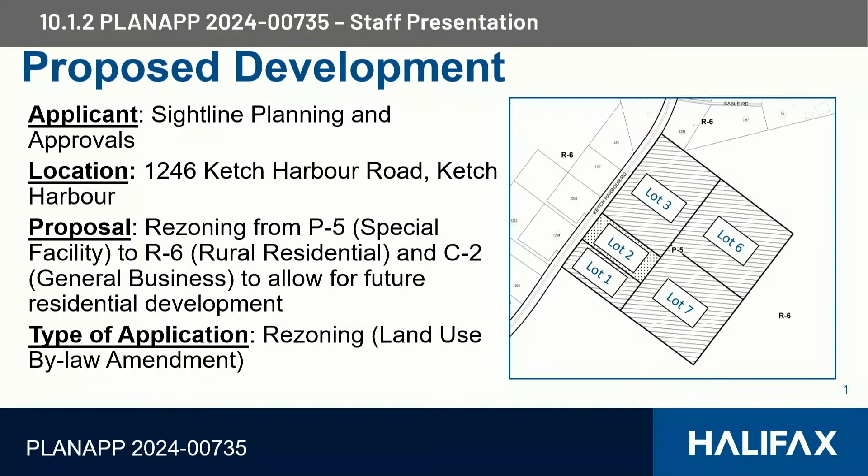Our applicant this evening for this application is Sightline Planning and Approvals. Again, our location is at 1246 Ketch Harbour Road in Ketch Harbour. As shown here in the photo on the right, we're looking at rezoning the larger PID from P5, which is the Special Facility Zone, to R6, which we call the Rural Residential Zone, and the C2 General Business Zone, to allow for future residential development. So again, our application is a rezoning application. Excuse me, could we get the volume put up a little bit?

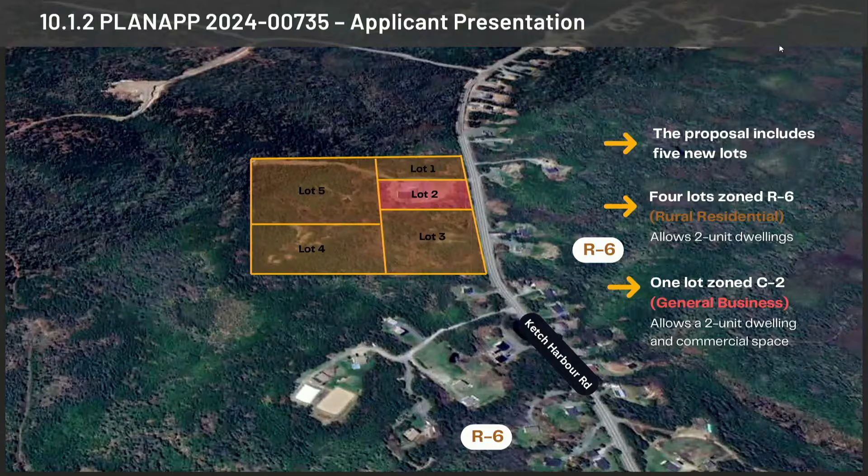If the rezoning is approved, the property owner would be allowed to convert that existing building into a mixed-use building with up to 5,000 square feet of commercial and 2 dwelling units, or convert the existing building to residential units only with 2 dwelling units, similar to the other lots with that rural residential zoning.

If the rezoning is approved, the 4 rural residential lots would allow for single unit and 2 unit homes, shared housing, or home businesses.

JRL Consulting submitted a traffic impact statement, and the results show that the traffic generated by the proposal is minimal, and so is traffic in the immediate area, so we don't expect any significant impacts surrounding the transportation network.

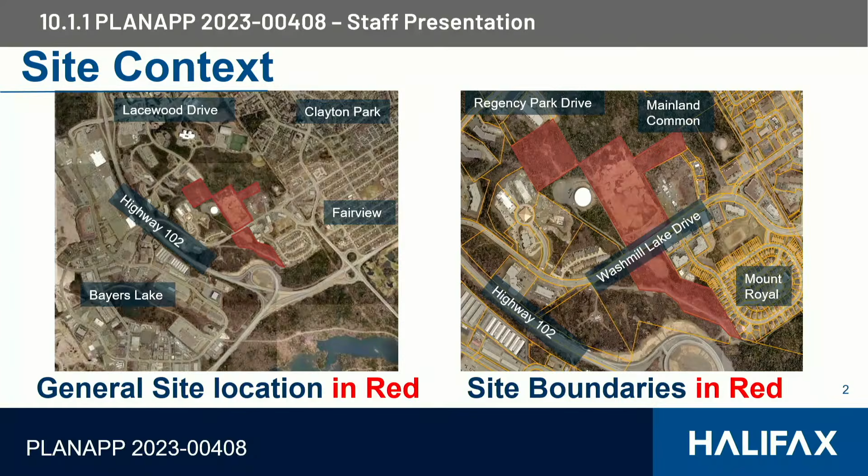For neighborhood context, the site is surrounded by a mix of uses, although it's predominantly residential, provided mostly in apartment building form, largely mid-rise apartment buildings. There are some low-density residential uses shown near the site. For other uses, it's largely recreation, parks, and institutional uses, including the open space of the Mainland Common, plus the rec center and the high school located nearby.

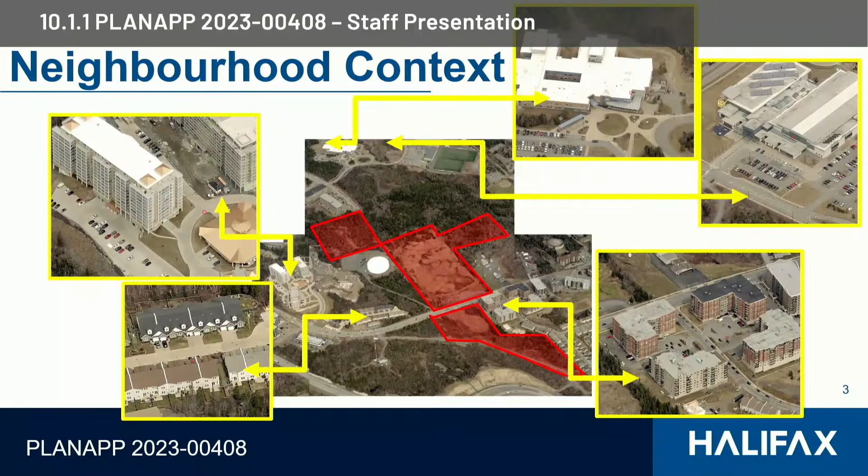Planning policy overview. Similar to my colleague, I'll provide a quick planning 101 about the 3 levels of documents in HRM that guide development and growth in our community and municipality. We'll start with the regional plan. This document is 30,000 feet in the air, looking at all of HRM, and it guides where population growth and the investment of services like transit, piped water, and sewer should occur.

Next we have the community plan, zooming in a little closer to a very specific geographic area. The community plan for this application is the Halifax Municipal Planning Strategy. It gets more detailed about what type of uses can happen where, outlining where and how which types of development may occur, either through the land use bylaw, which I'll speak to next, or through planning applications such as the one you're hearing tonight. It outlines some uses that can be considered, but only if there's community consultation and approval by council.

Next we have the land use bylaw, the most detailed document we have. It follows through on the community plan. So just as an example, the community plan may have said yes, residential is an acceptable use here; the land use bylaw is the teeth that provides that land use on those properties. It outlines the zone, the permitted uses, and the regulations within it. If you can meet the permitted use and the regulations, you don't need any special approval—you can go and get a permit from a development officer.

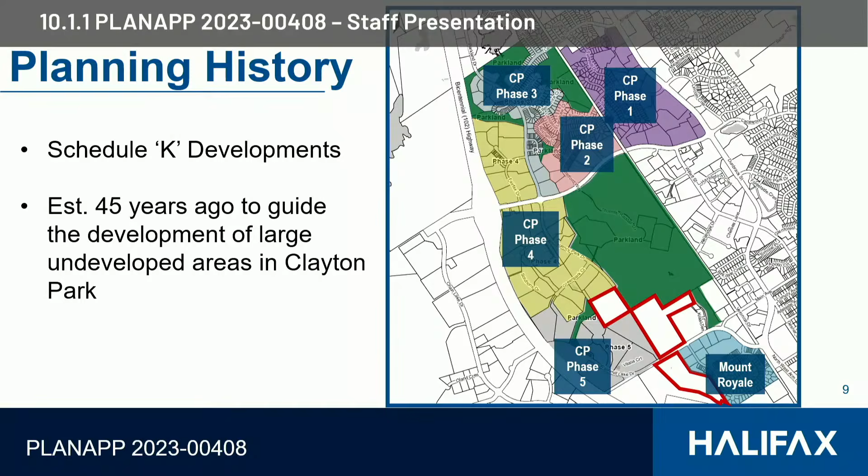That growth could happen on a case-by-case basis through planning applications and comprehensive planning through development agreements. As we know, these lands have largely been developed over the past several decades. You can see Clayton Park West phases 1 through 5, and then the Mount Royal subdivision. The subject site is outlined in red, and it is the last remaining vacant land within the Schedule K zoned area.

The Schedule K policies envisioned a two-stage approval process. Stage 1 addressed very high-level matters such as land use, residential densities, parking requirements, parkland dedication, and road network—very conceptual. Following Stage 1 approval, there would be applications for Stage 2, which gets into much more detailed matters such as residential unit types and locations, and the architectural building designs of each building. The intent was that each building would come in through a Stage 2 agreement.

Now, as this is the last remaining Schedule K lands within the area, the applicant is requesting consideration of both the Stage 1 and Stage 2 development agreements under this application. As members of the community and council may already know, in 2018 Community Council approved a Stage 1 development agreement for the site, shown here on the screen. That agreement permits 1,216 residential units, including apartments and townhouses, and also the extension of Regency Park Drive through to Washmill Lake Drive.

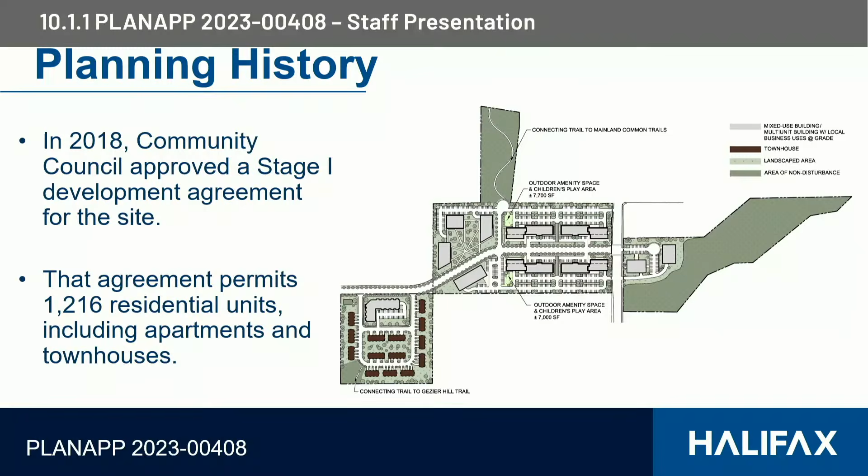In 2023, the property owner applied to amend the existing development agreement, which is the subject application before you today. Given the significant changes to the proposal, it's recommended that we discharge the existing Stage 1 development agreement and replace it with the proposed application. This is just a matter of process—instead of going line by line through the old agreement, it's easier to discharge and then replace it with new. It's cleaner for administrative purposes.

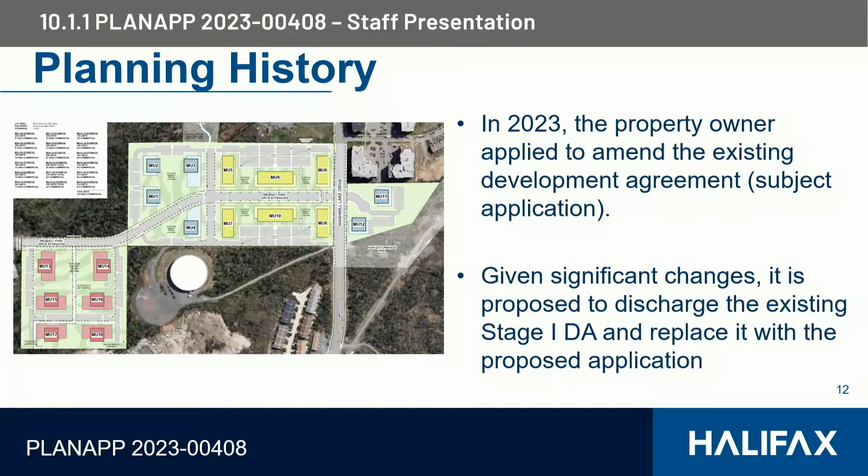I'd also like to highlight that while this application was being considered, in 2024 the Housing Accelerator Fund amendment package was brought before Regional Council and approved. As part of that package, the Schedule K lands were removed from the planning policy. This was largely done to enable the built lands—most of the Schedule K lands were already built and have been built for a long time. It was an opportunity to allow those properties to take advantage of the expanded development rights, largely secondary suites, and also the opportunity to get up to 4 units per lot.

So the Schedule K was removed, and whatever was built, the underlying zone was replaced to reflect that existing development pattern. An example would be a single unit dwelling built under Schedule K—that was removed, and the lands were zoned R1 through HAF amendments. But because they removed the Schedule K policies, which this application was being considered under, a transition policy was inserted into the plan.

That leads us to our first enabling policy, which is 3.23. This was a transition policy that allows council to consider in-progress applications for the Schedule K lands. There are some parameters around that—the application would have to proceed to a public hearing within 36 months of the first reading of the HAF amendments. So that 36 months would be next year.

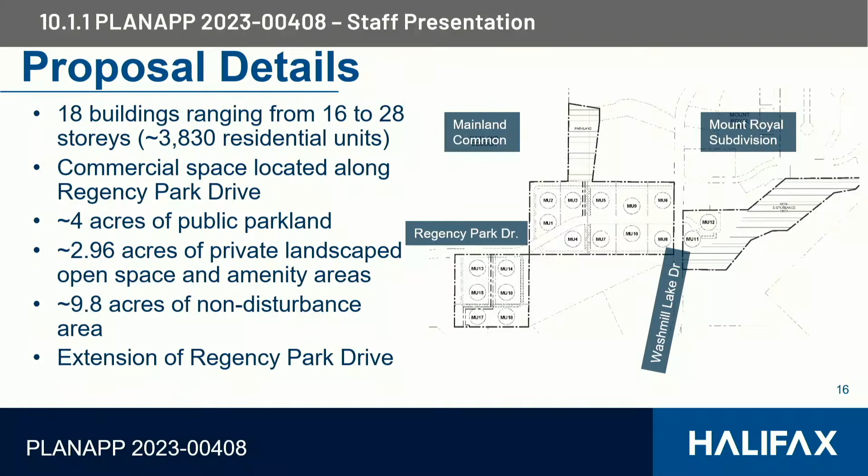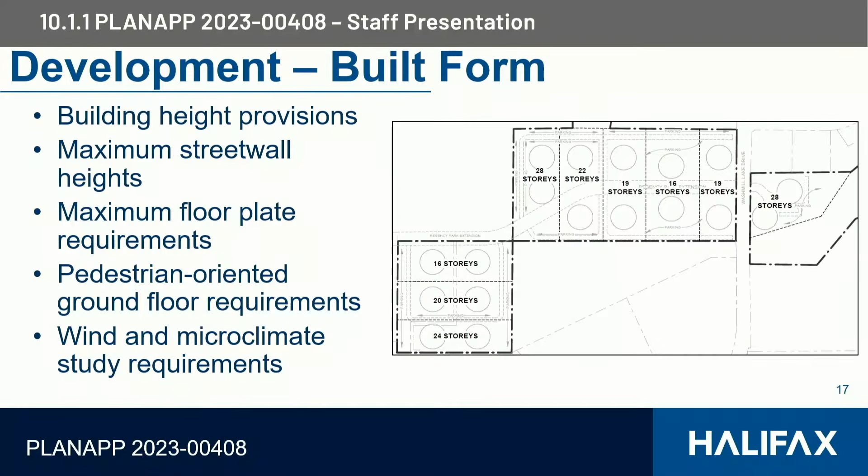The agreement, as mentioned, will be a stage 1 and stage 2 agreement combined into one per the request. Staff's answer is to write a pseudo land use bylaw amendment, taking the approach of the Regional Centre Land Use By-law by requiring form-based codes that provide predictable built physical form. Controls are included to regulate building height provisions, maximum street wall heights, maximum floor plate requirements, activating the streetscape, providing pedestrian-oriented ground floors, and wind and microclimate study requirements at the building permit stage.

In addition, approximately just shy of 4 acres of parkland is to be added to the existing mainland commons, with a requirement to construct a trail as part of that dedication to connect to the existing trail within the mainland common.

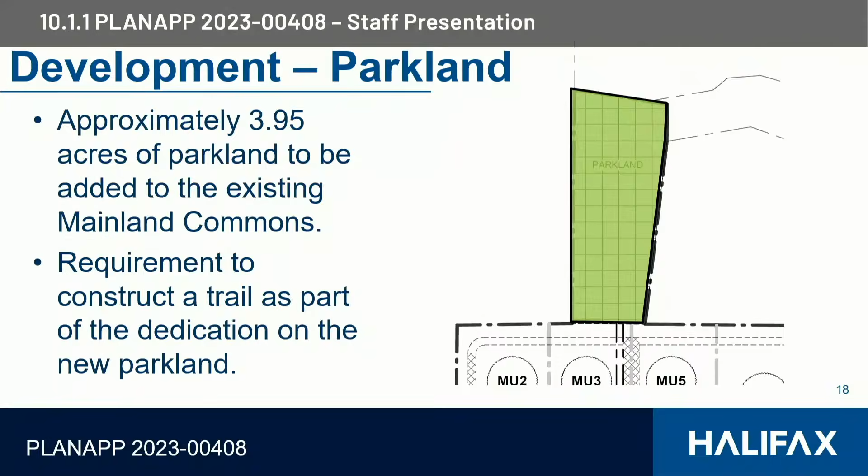With this development, a key gap in the mobility network is being provided - the extension of Regency Park Drive to Washmill Lake Drive. This is an important piece of infrastructure that will complete a key link in the transportation system, improving access and connectivity for pedestrians and other modes including transit, and helping relieve pressure on the broader network. This connection has been long contemplated but not provided until this proposal.

Regency Park Drive will be a complete street, including transit, bike, and pedestrian infrastructure, and the agreement requires that it be built first - meaning the street, including traffic lights, bus stops, bike lanes, and sidewalks, must come ahead of the development.

In terms of public engagement feedback, the level of engagement completed was consultation, achieved through the HRM website, signage posted on the subject site, a mail-out notification, an online survey, and an online information video. In terms of stats: 2,640 notifications were mailed out, 12 individuals either called or emailed the planner on the file - me - directly, and 2,866 web page views were provided.

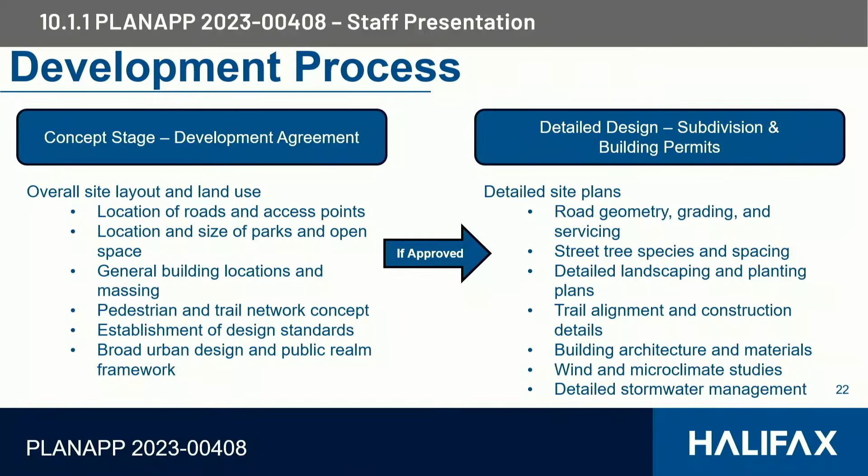So elements of the development agreement, I've touched on this already, but I'll quickly go over it again. 18 buildings ranging from 16 to 28 stories, 3,830 residential units, multi-unit predominantly with grade-oriented units provided, 14,000 square meters of commercial space along Regency Park Drive, the extension of Regency Park Drive to Washmill Lake Drive with bike lanes, transit, and active transportation connections.

Parks, trails, and open space integrated into the mainland common, including approximately 4 acres of parkland and 3 acres of landscaped amenity space. A non-disturbance area of approximately 10 acres to protect a significant wetland and riparian zone. And then ultimately to allow for a mixed-use high-rise development required to meet regional center land use bylaw type regulations.

Some key aspects, as I mentioned, the agreement establishes a pseudo land use bylaw, so detailed building and site design is going to be addressed at permitting. Regulations and standards are set now in the agreement to guide that detailed design, so wind studies are required.

Streetscaping requirements are also written in, as well as detailed stormwater management. And then an updated traffic study is also required at 60% build out, and this is to reassess the infrastructure and impacts at key intersections in and around the development.

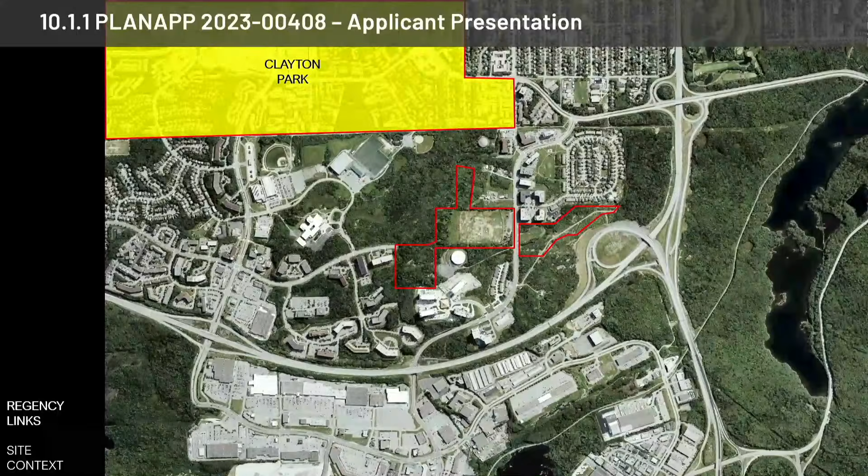The site is located at a critical point between several established communities: Fairview, Clayton Park, Lacewood, and Bayers Lake. It sits within a fully serviced urban area surrounded by residential neighborhoods, a major commercial center, and regional recreational facilities. It is in the center of the city.

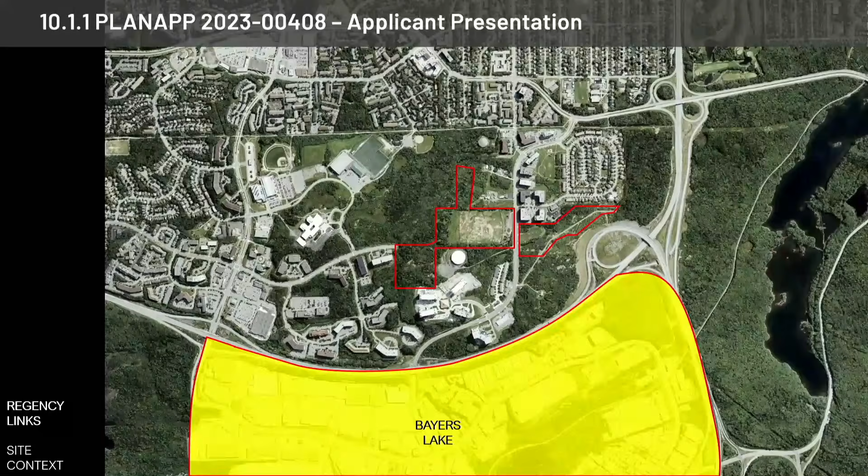The site is immediately adjacent to a strong network of schools and community institutions, including Park West School, Fairview Junior High, Halifax West High School, and Keshen Goodman Library. This level of proximity supports walkability, families, and everyday convenience.

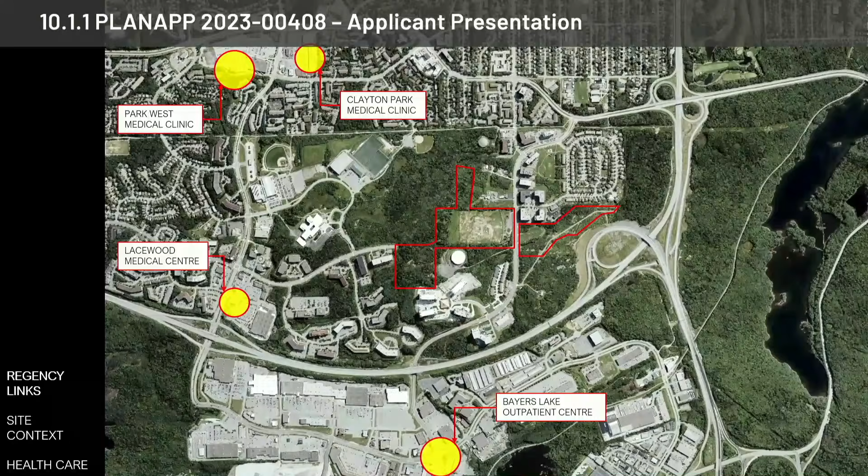Residents will also be in close proximity to a range of healthcare services, including Bayers Lake Outpatient Center, Park West Medical Clinic, Clayton Park Medical Clinic, and Lacewood Medical Center.

The site is adjacent to one of the most significant recreation hubs in Halifax, including Canada Games Center, Soccer Nova Scotia, and several Mainland Common sports fields. Access to recreation is immediate.

Equally important is access to parks and trails, including Mainland Commons Park and Trail, Geizer's Hill Trail, and Chain of Lakes Trail. These connections allow residents to move through the site and beyond using active transportation. The site is also supported by transit through the Lacewood bus terminal, providing strong connectivity across the municipality.

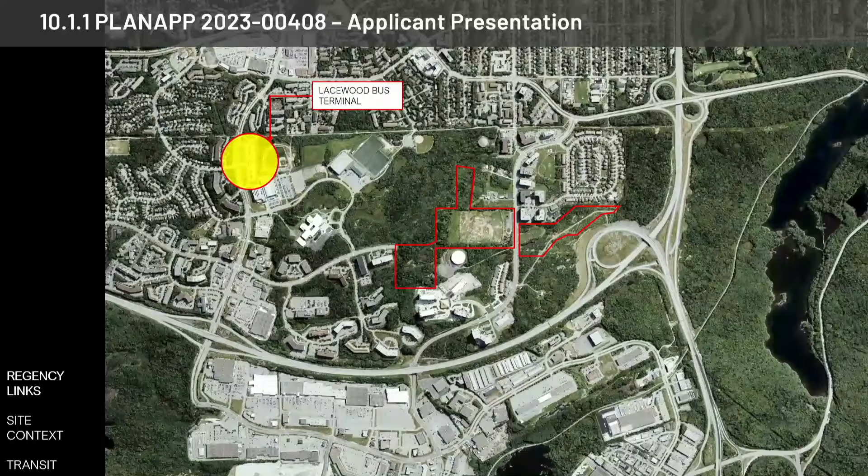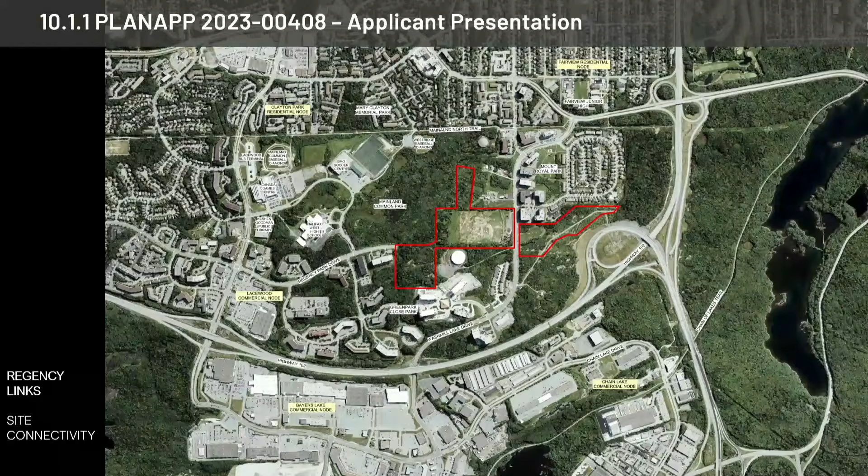Today, residents must drive throughout Bayers Lake Business Park or Lacewood to access schools, recreation, and services. This creates inefficiencies and unnecessary congestion.

If you live in Mount Royal today and want to access Canada Games Center, there are two routes: you either have to take Lacewood or Bayers Lake, going through 8 or 9 intersections with multiple crosswalks. The same applies if you live in Fairview and want to go to Halifax West High School - there are 2 routes, either Lacewood or Bayers Lake.

If you live on Greenpark Close and want to go to Fairview Junior High, these are the 2 routes you have to take. Taking any of these routes, it takes about 10 minutes to get to where you need to go.

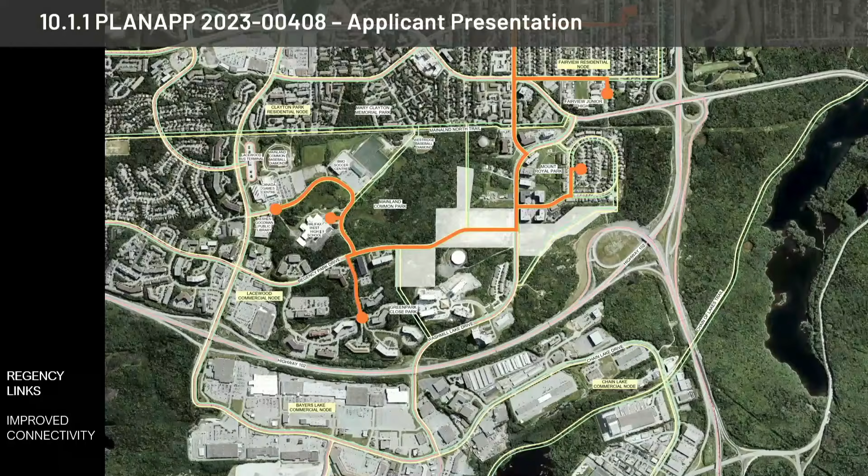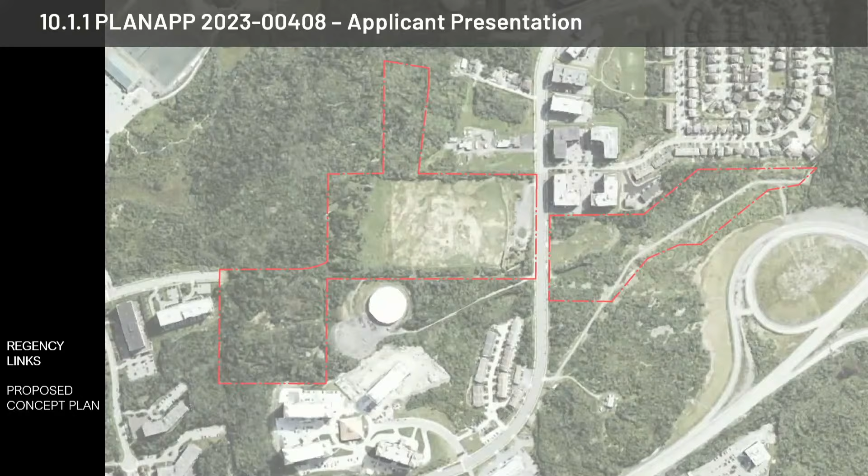Next, I would like to share some key elements of our concept plan. The concept plan begins with environmental responsibility. Areas with existing vegetation and natural features are identified as non-disturbance zones and are preserved and integrated into the design. We have about 14 acres of non-disturbance areas.

The Regency Park Drive extension becomes the organizing spine of the development. Vehicle circulation is designed to be efficient, well-distributed, and coordinated with parking while minimizing conflicts with pedestrians.

The concept plan is guided by the site planning and urban design framework that organizes building open spaces, footprints, and circulation into a cohesive and connected layout. The site includes direct connections to Mainland Commons Trail and Geizer's Hill Trail, allowing residents to move seamlessly between their homes, open spaces, and the broader trail network.

The next slides illustrate a range of building forms across the site. The development includes a mix of tall mid-rise and high-rise buildings with heights ranging from 16 to 28 stories. I'm going to show you where this height is distributed. The first two buildings are 28 floors, then 25 floors.

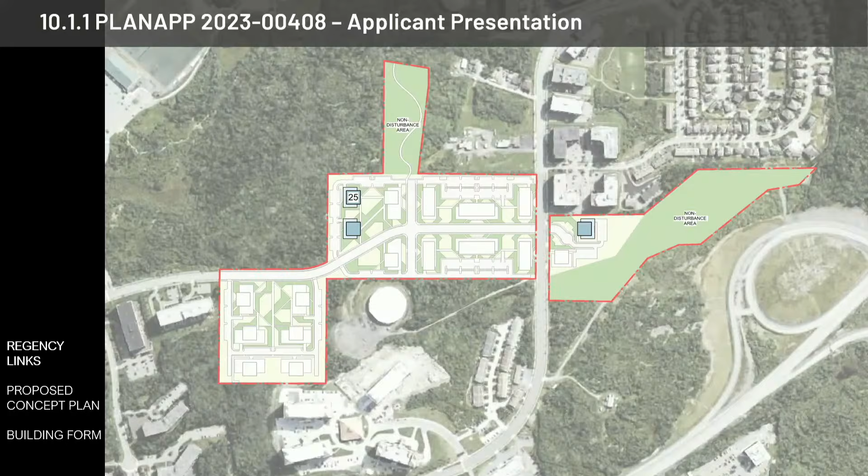The two we're showing are 24 and 22 floors, then 20 floors, 19 stories, and 4 buildings at 16 stories. These heights are strategically distributed across the site to enhance architectural articulation, create visual interest, and avoid uniform massing. This approach ensures a more dynamic skyline and a better relationship between buildings and open space.

This slide highlights areas of the site that include mixed-use buildings with commercial uses at grade and residential above. These are intended for local commercial and service uses with opportunities for spill-out activity, patios, and active frontages. This slide shows mixed-use buildings that serve more neighborhood-oriented commercial uses at grade. These uses generate less traffic, are more walkable, and therefore require less surface parking.

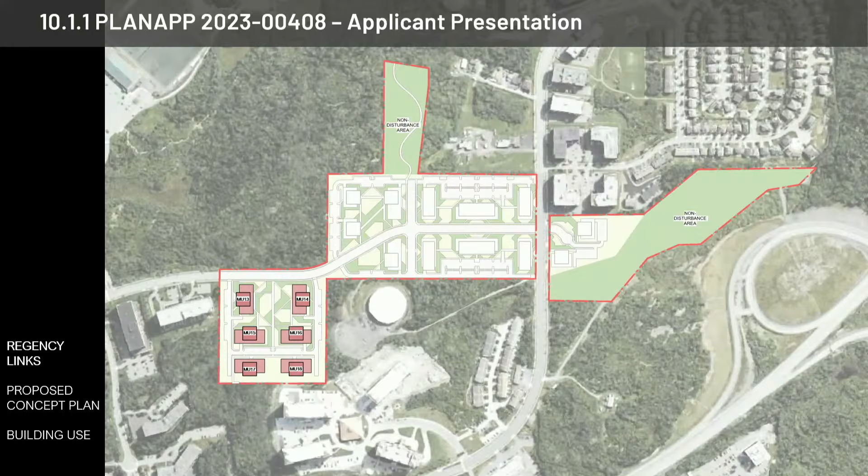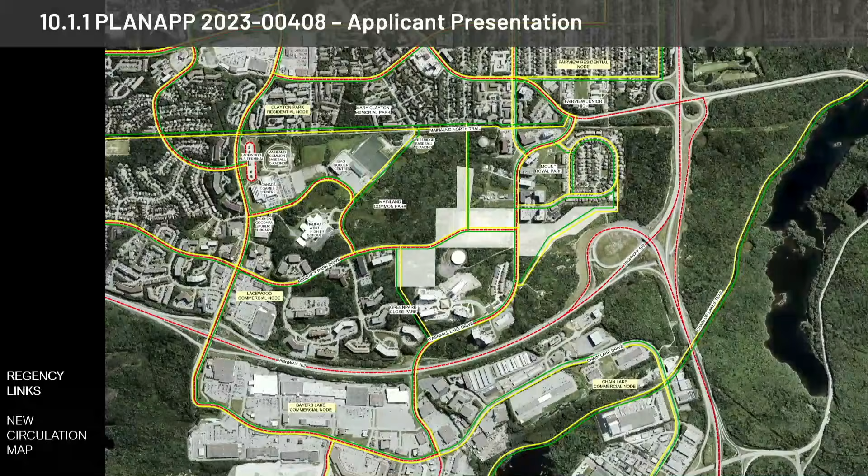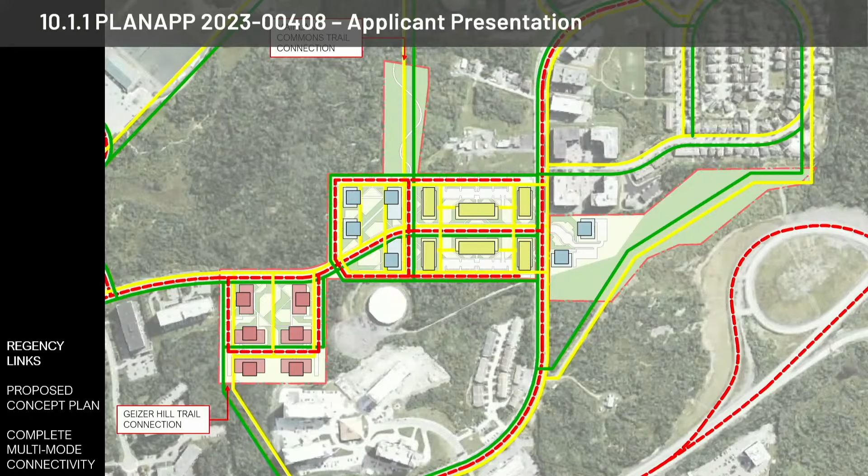Open space design: besides being adjacent to parks and provincial recreational facilities, we want to take advantage of the vast amount of open space that our proposed concept plan provides.

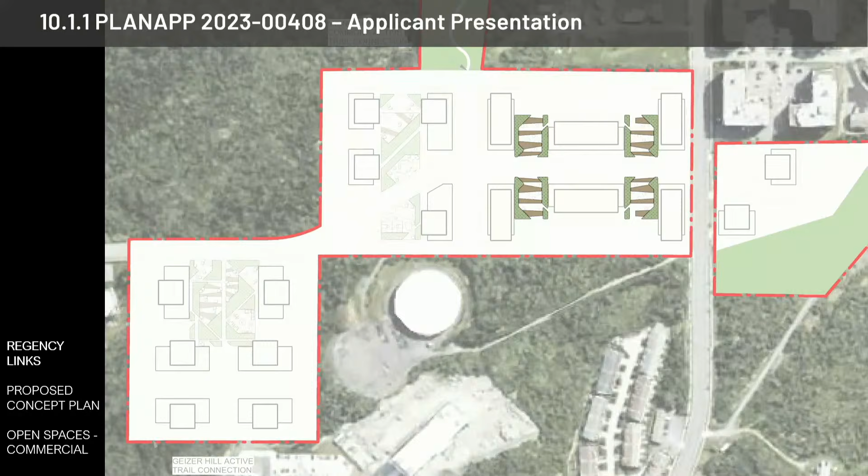This slide shows open spaces associated with commercial uses. These include hard landscape plazas, seating areas, outdoor patios, and vendor kiosks. These spaces are intended to support spill-out commercial activity and create vibrant and active public areas.

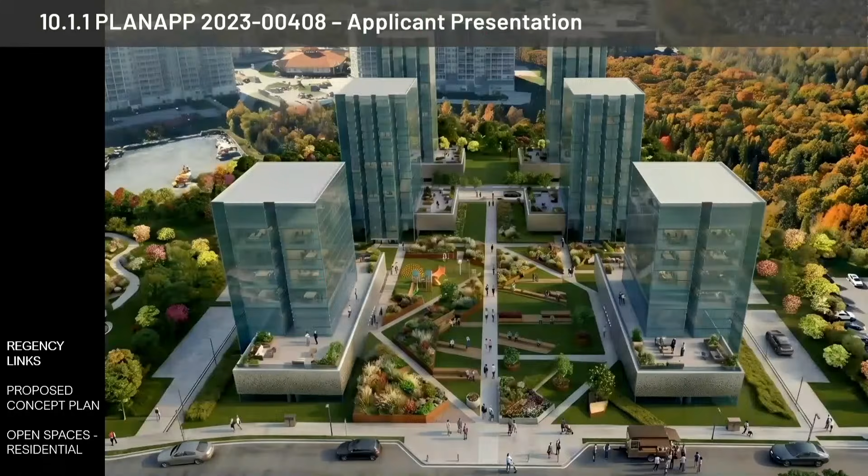Finally, the next few slides are massing representations and provide three-dimensional visualizations of the proposed open space areas. These images help illustrate how the spaces will feel at ground level, including scale, landscaping, seating and activity areas, and the relationship between buildings and open space.

Collectively, what these slides demonstrate is that Regency Links is not just about buildings. It's about how these buildings, spaces, and connections come together to create a complete and livable community.

Finally, I want to leave you with a few points on the merits of this proposal, and why Council should approve it. I have five reasons. First, your planning staff have completed a comprehensive planning and policy assessment, and concluded that this proposal is consistent with the intent of the municipal planning strategy.

Second, all relevant internal departments and external agencies have reviewed the servicing and technical aspects of the proposal, and their input is reflected in staff's positive recommendation before you today. Third, the form and building design guidelines embedded in the development agreement are grounded in the principles of the Regional Centre Land Use By-law, emphasizing high-quality built form, articulation, and human-scale design—principles shaped through extensive public consultation.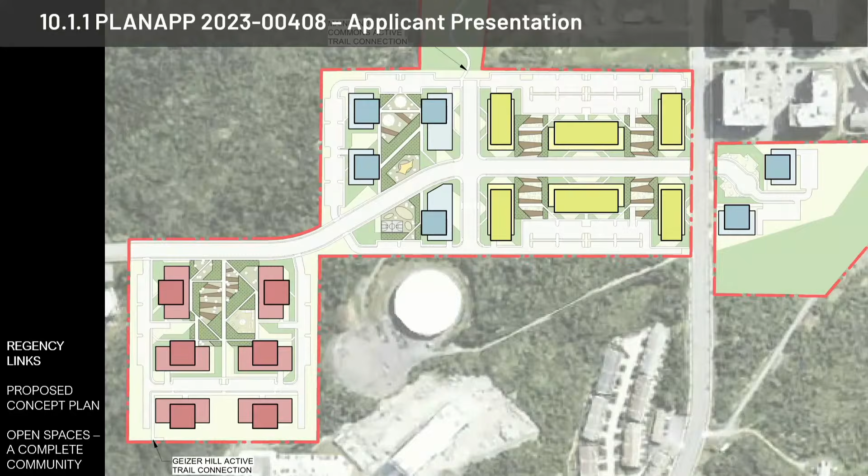Thank you. Could you say what the commitment is on the width of Regency Park Drive, the extension there? What type of street will you be building, and how wide will it be? And also, could you tell us a little bit about the parking? Will there be below ground parking, and what's the parking ratio to housing units?

Thank you, Councillor Morse. For the first question, the geometry of the extension has to be consistent with what's there, because it just ends like this — it was envisioned that way. I'm sure you know the area; it just cuts off and ends there. We're going to have two lanes, not four lanes, with the possibility of parking on the side if HRM would allow, sidewalks, and dedicated AAA bike lanes on both sides.

So that is as far as proper bus stops and crosswalks according to HRM guidelines. As far as parking, all residential parking is underground, with a ratio of 1-to-1. Because of the form of the building and the area of the land, it allows us flexibility to provide one parking space per unit. Having said that, whenever you have mixed uses, they start feeding off one another, with visitors coming in the evening after businesses close. So there are more synergies between mixed-use buildings, but every building has underground parking at a 1-for-1 ratio.

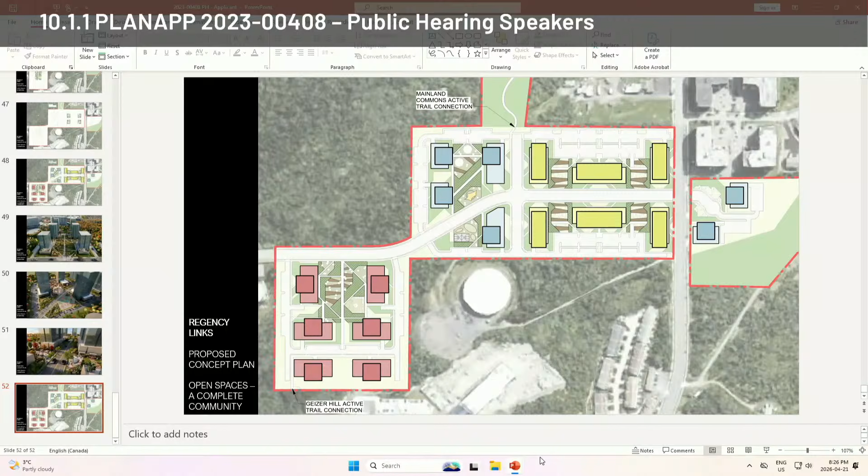The water for these 2 buildings comes from the other side of Regency, so the piping has to come through the road to service those 2 buildings across from Washmill. So those 2 buildings will not be built first. They will be built when Regency is extended, so that concern is not valid, because the road will be extended first. They will not be built in isolation. Of course, all their access will be...